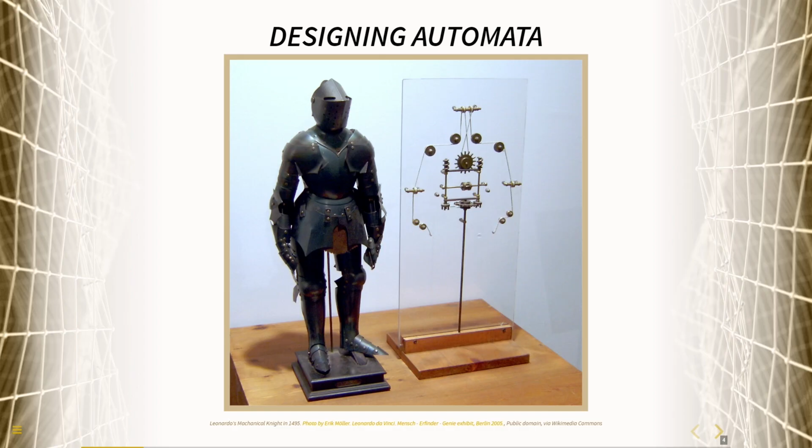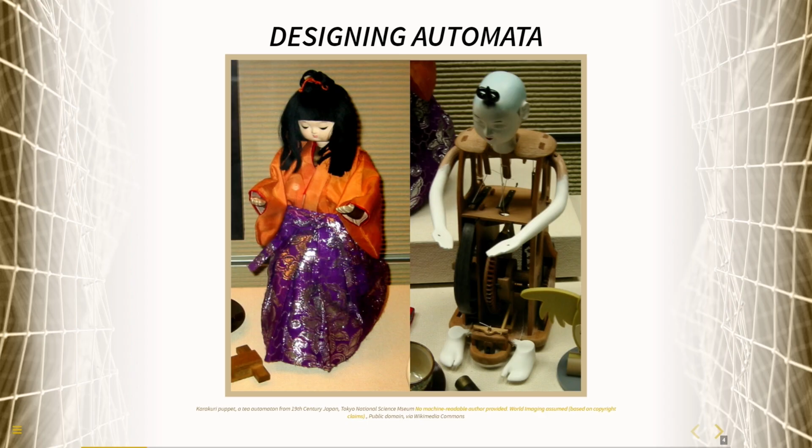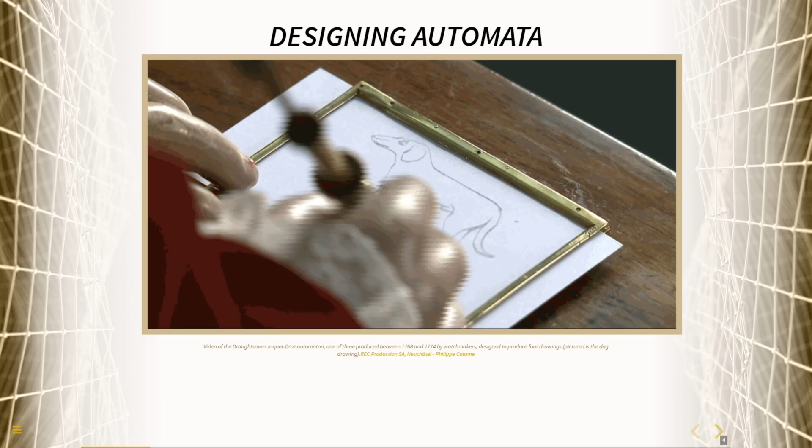As we began to build more and more kinds of automata, the level of sophistication started to increase. Thinking back to the technological changes happening during this time, so many different ingredients were being introduced, whether different kinds of materials or different kinds of understanding, that allowed things to become more and more sophisticated.

So much so that sometimes we would even build things like this. This is the Mechanical Turk in 1770, a chess-playing pseudo-automaton. For the longest time, people thought we had actually developed a chess-playing automaton. People would come and play chess with it and be foiled by this machine. But the reality was, under the hood was a guy just sitting there playing chess back. It was still an ingenious device, still filled with intricate mechanisms, but it was mostly trickery.

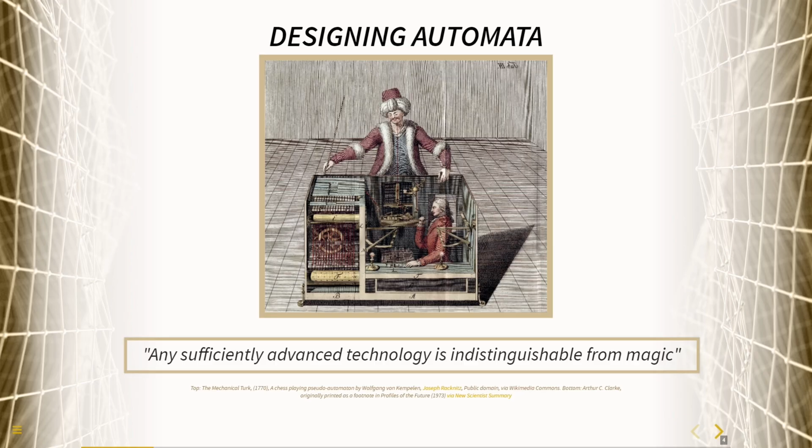Which is an interesting juxtaposition with this Arthur C. Clarke quote about technology: any sufficiently advanced technology is indistinguishable from magic. Often when we look at different kinds of tools, especially modern day AI tools, they sometimes feel magical. But I want you to remember that under the hood is human effort, and under the hood are different kinds of constructs that we have actually put together.

In 1948, Norbert Wiener introduced the concept of cybernetics. He wrote this incredible book called Cybernetics, or Control and Communication in the Animal and Machine. He was a polymath, so this spanned many different concepts and disciplines. At its core, you can define cybernetics as the study of controlling the flow of information in systems with feedback loops. He had many applications outside of computing, but I'll focus on the applications within computing for our conversation today.

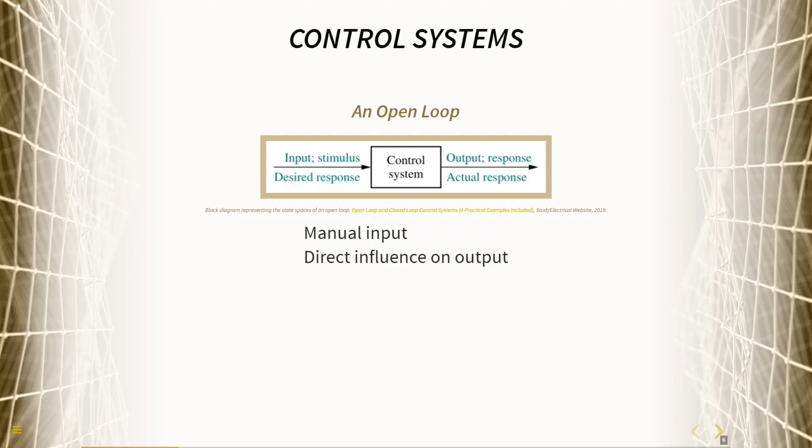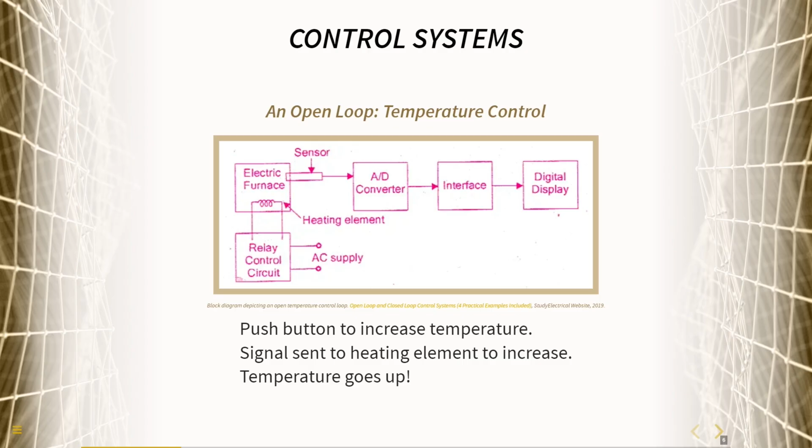You can think of this in terms of there being a manual input, a direct influence, and an output. This is also known as an open loop. For example, a temperature control system using an open loop would simply have a push button to increase the temperature, a signal would be sent to the heating element, and the temperature goes up. Easy peasy. But what if you want things to adjust? What if you want the world to adapt to your needs?

Wiener introduced the concept of feedback in control systems, and this was revolutionary at the time. It meant you could take the output of that second state and use it to influence the entire action all over again. You could close the loop, so to speak.

A closed loop system has a reference signal, an input that you start with. There's an error detector that compares the feedback against that reference signal, and then it moves through the system to give you a particular output. If there's a difference between what you want and where you started, the desired output is updated—an adjustment is made.

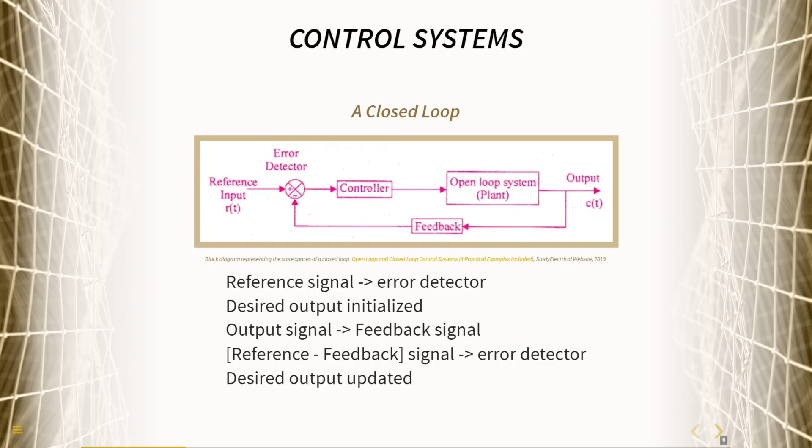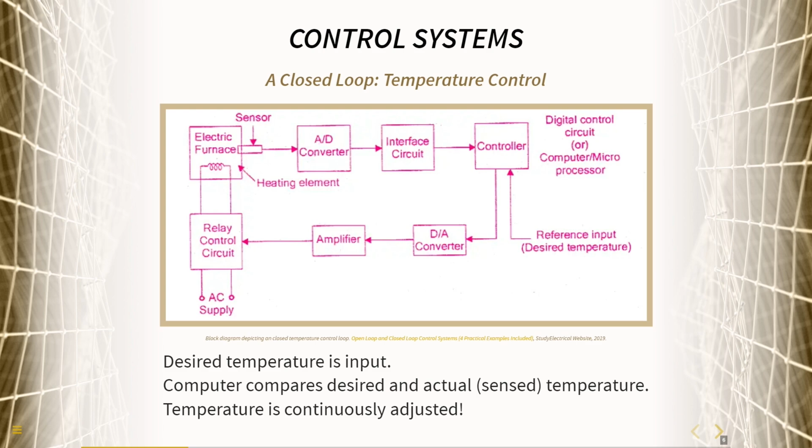The temperature is then continuously adjusted. This is how modern thermostats work. This idea of feedback is incredibly powerful, because you can now close that loop and make continuous adjustments, monitor, and make changes in the system as you're working it.

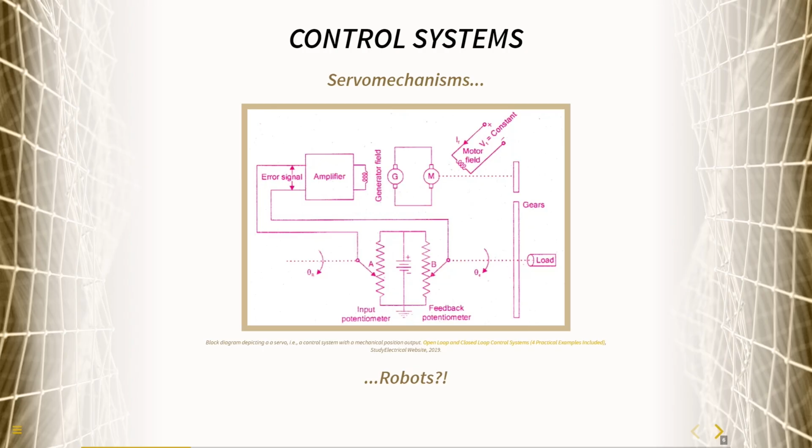This laid the foundations for the concept of servos—control systems with a mechanical position output. It meant your input could say, okay robot, move there. There's a lot more in between servo mechanisms and robots, but this really laid the foundation for how we think about and build robots even today.

So let's spend some time conceptualizing automation. Automation can be defined as the use of technology to perform tasks with reduced, sometimes no, human assistance. But that isn't just a binary thing—it's not yes or no. There are different levels of automation we can go through.

Basic automation involves simply automating a simple repetitive task—think of a forklift that just picks a box, puts a box, picks a box, puts a box. From there, we can bump up a level to process automation, where we automate a complex set of workflows across systems. Modern software engineering involves a lot of process automation, where I make a change in the code here, and when I deploy that code to a server, the entire chain of actions should happen.

You probably use a lot of different kinds of automated processes in your own work, whether it's something like setting up a calendar reminder, or saying the moment I invite so-and-so to a meeting, send them a Zoom invite. These are basic process automation examples. Our goal is to get to the idea of intelligent automation: automated responses that improve through learning from priors and context. It's that feedback concept again. At the core of a lot of what we talk about is feedback and contextual awareness. Let's look at the different genres of AI that take these ideas into account.

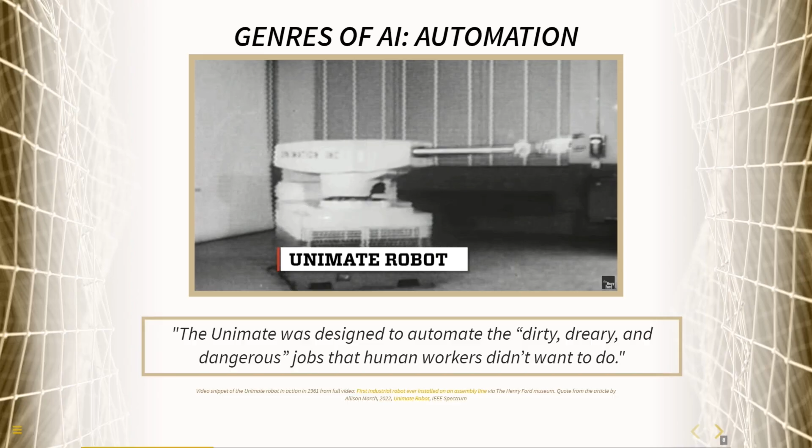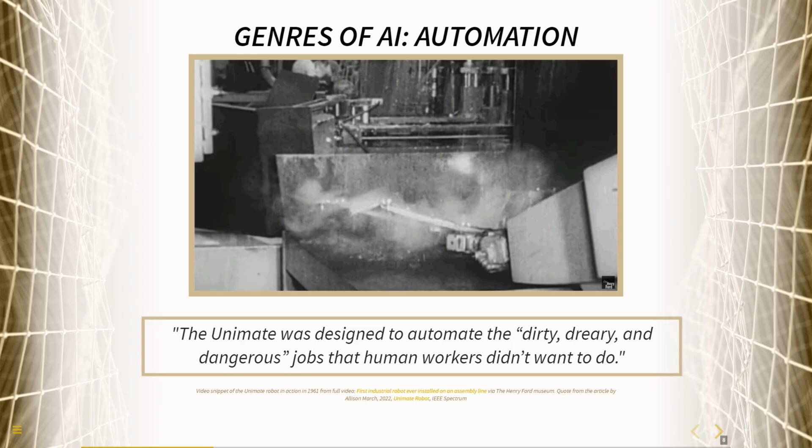First, let's think about automation. The first industrial robot was the Unimate, designed to automate the dirty, dreary, and dangerous jobs that human workers didn't want to do. Remember, someone had to define what those jobs were. I chuckled when I saw a marketing image of the same robot serving drinks at a bar, because apparently that was also an example of a dreary job somebody didn't want to do.

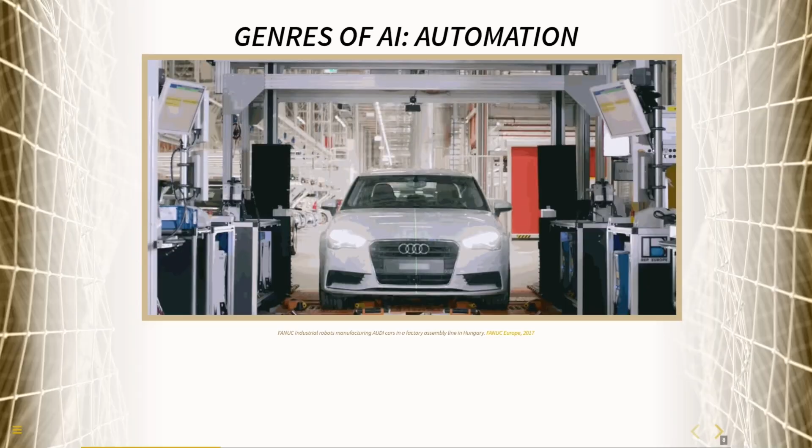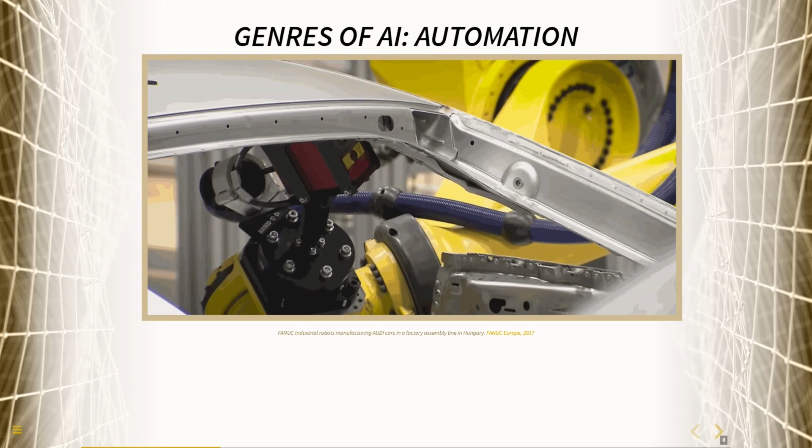There are industrial robots manufacturing entire cars in factories. This particular example is the Audi factory assembly line in Hungary. You can see from start to finish the many different kinds of automation, coordination, and synchrony that has to happen in order to go from metal parts to a moving car.

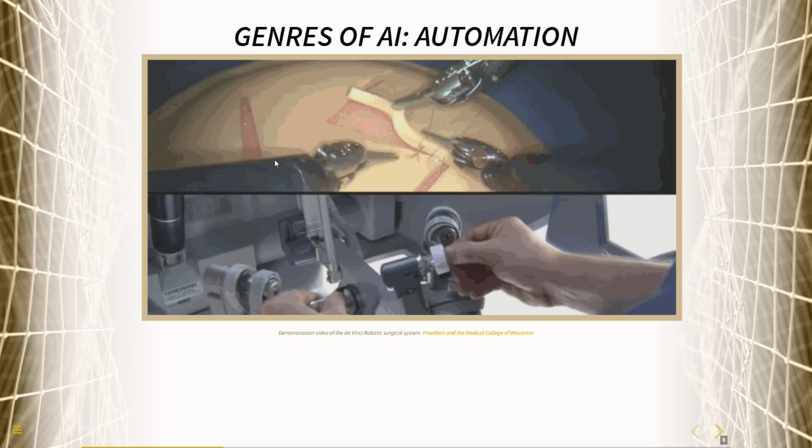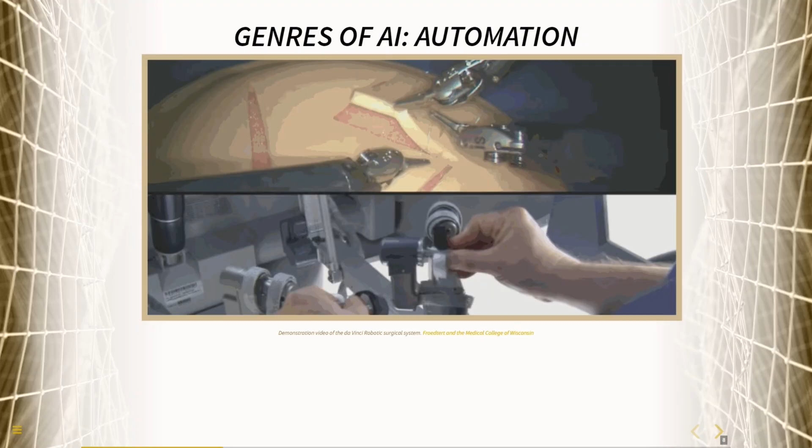A lot of these industrial robots, I think it's important to remember, are actually fairly specialized. In this case, we're looking at the Da Vinci surgery robot, designed for very specific types of human-robot interaction. Here, it aids a surgeon in performing specific minimally invasive surgery tasks.

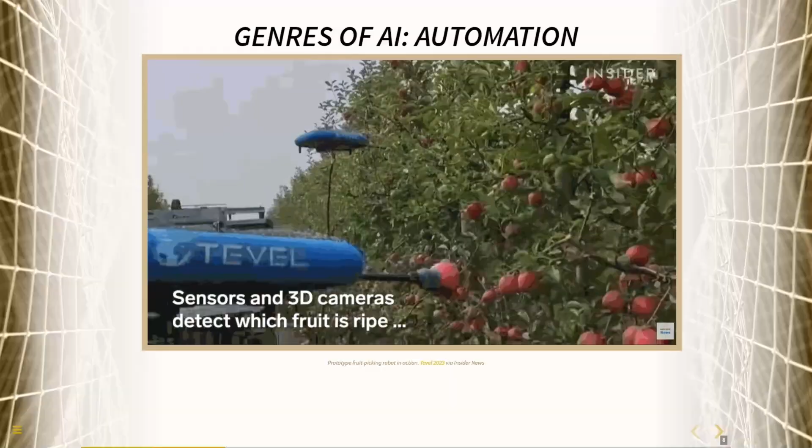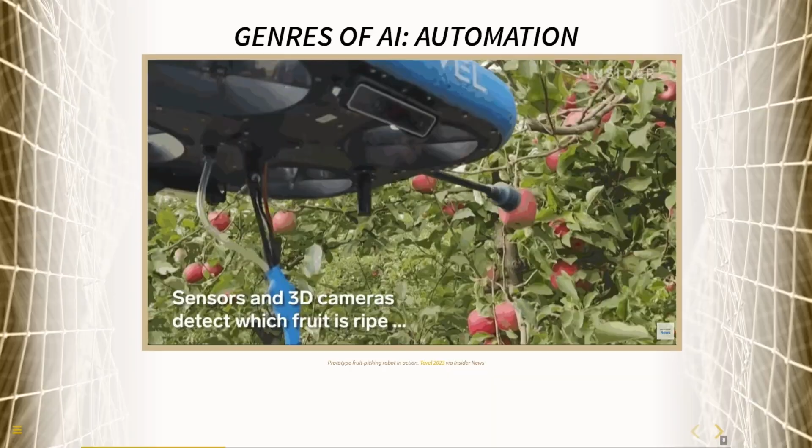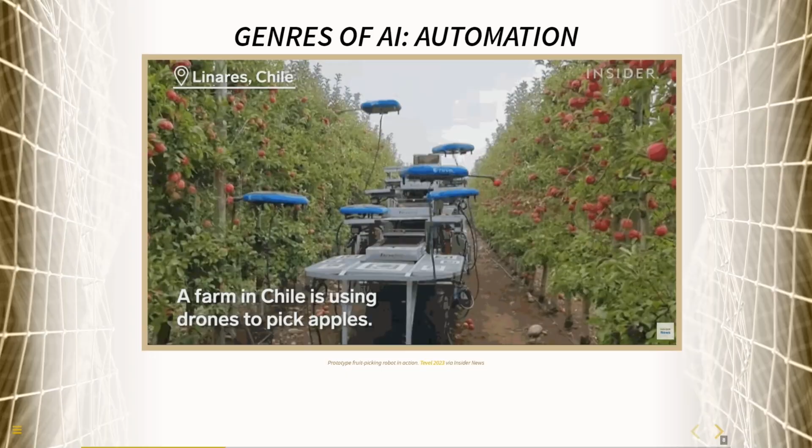In that sense, industrial automation is always a specialized task, as we map workflows to determine optimal modes of production in very specific contexts. Each of these examples required someone with specific understanding of how humans performed these tasks, in order to determine what to automate. What constitutes a tedious, dirty job worth automating? Later on we'll talk about the impacts of automation on labor and society, but I want you to keep in mind this idea of task mapping as critical to producing specialized technologies like industrial robots.

We're not quite at the point where we're having robots making robots, but you can see that this is the general trajectory things are moving in, for better or worse. We'll dig into this a bit more another time.

Next, let's look at robotics. Robots, as a general class of AI, are for the most part general purpose technologies—we're clearly still experimenting with form and function. But at its core is that same robotic architecture: a sense, a decide, and an act. In this case, we're looking at a slightly more rudimentary sense-decide-act architecture, where sensor input data is fed into a decision tree that determines actuator function.

If we introduce the concept of feedback, we again have this reactive sense, decide, act architecture, but now we're introducing reasoning, monitoring, and adaptation as part of the decision-making process. Feedback instantiates as reasoning about the behavior of objects, planning to change the world, monitoring changes, avoiding objects—doing something different. One of the biggest things we had to start doing was think in modules. As robotic systems got more complex, it wasn't just a single arm grabbing a drink; we needed to integrate modularity as an architectural pattern in the construction of robots, meaning each component might become different subcomponents.

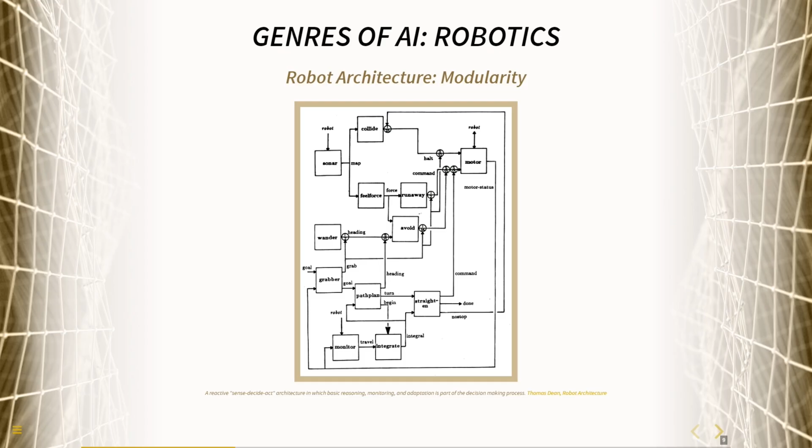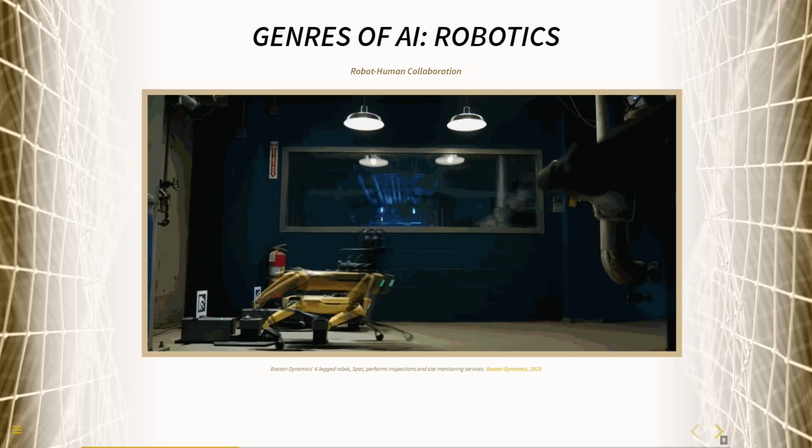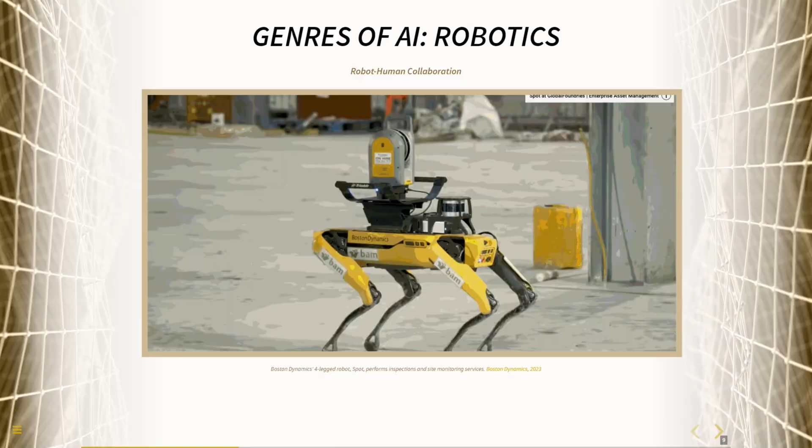But if we look at that same form factor, Boston Dynamics has gone in a completely different direction with the four-legged robot. Here we're looking at Spot as it performs inspections and site monitoring using a suite of complex sensors for spatial mapping, allowing it to detect issues or determine what comes next.

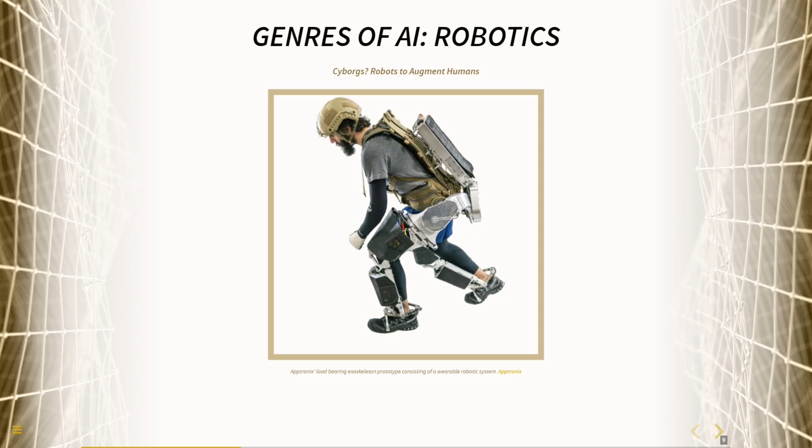I think it's a little bit amusing because in some ways we're already starting to touch on this concept of cyborgs, where robots are really there to augment humans.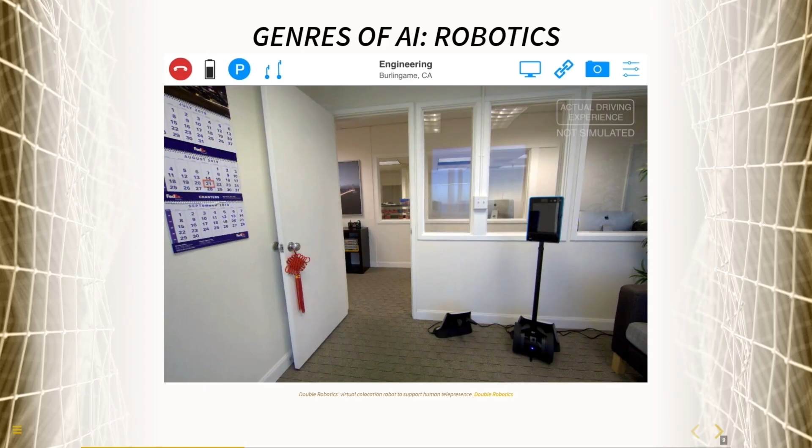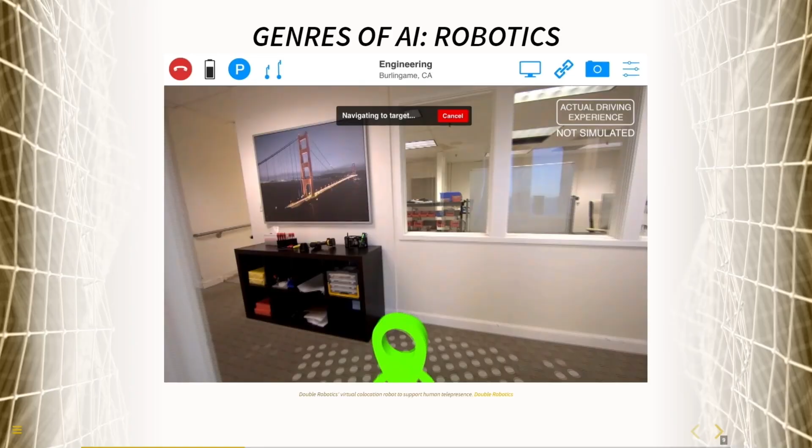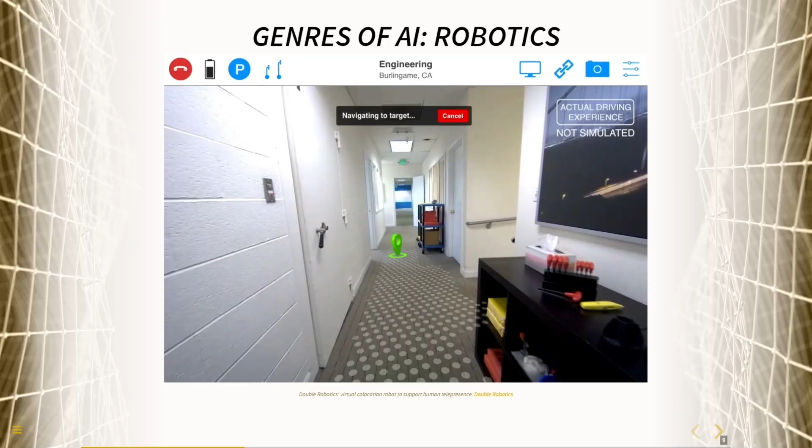A different form of augmentation, which is equally interesting, is Double Robotics' virtual co-location robot, designed to support human telepresence. In this era of remote and hybrid work, you should theoretically be able to log into this platform and drive yourself around as you interact with coworkers and go about a normal workday. So here we can see this idea of using robotics to collaborate with each other and augment our own experiences in the real world.

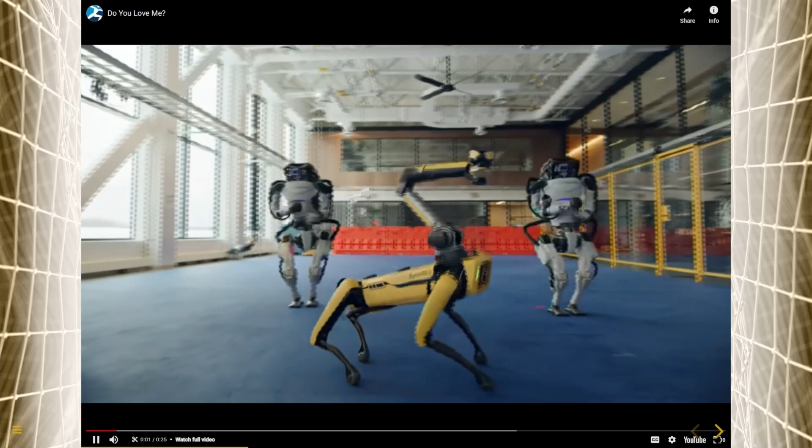So we've built a whole bunch of different kinds of robots. A lot of them are fun, a lot are interesting, and a lot are still conceptual, but we're beginning to see the different ways in which robots can actually start to integrate into our daily life.

One of the clearest examples of this is in the subdiscipline of autonomous vehicles. Going back to this idea of sense, decide, and act, an autonomous vehicle would theoretically be able to go straight, and the moment it sees an issue, it should be able to steer right or left, adjusting its movement as it goes down a path.

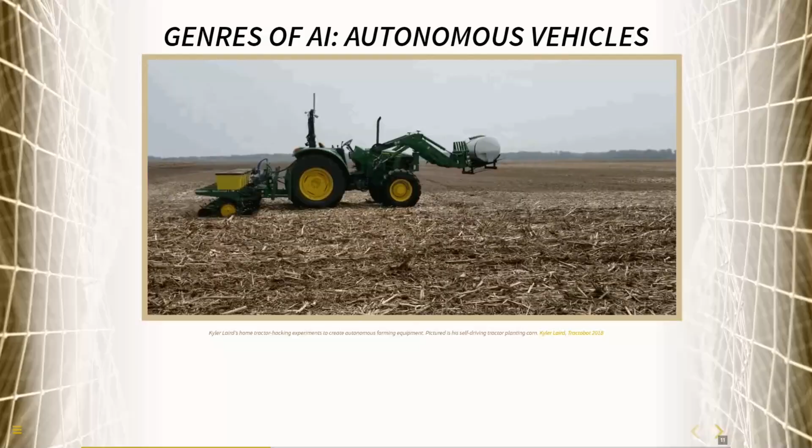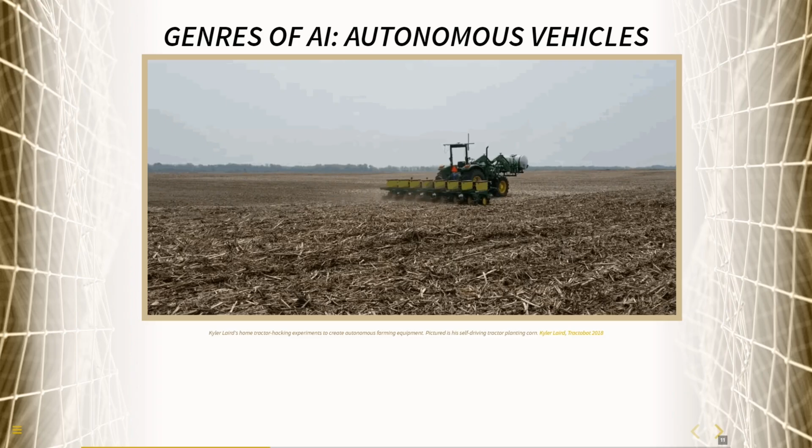We've done this in many different contexts. One of my favorite examples is Kyler Laird's home tractor hacking experiments, where he sticks together a bunch of microcomputers to build himself a self-driving tractor that plants corn.

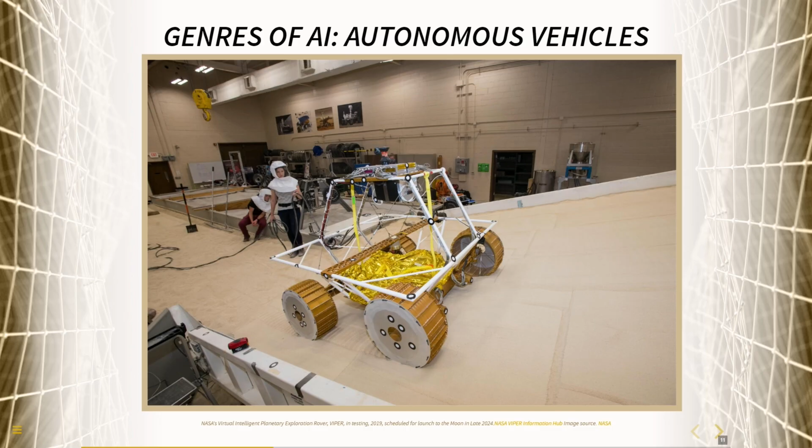So there are analogs for this in non-vehicular examples as well. They're just not standards yet.

So the core concept underneath an autonomous vehicle is this idea of the operational design domain. If I have a vehicle, can I detect the environment, geography, time of day, traffic, objects, even people, to say, okay, here's where I'm working within? And that is really what is used to drive decision-making in the vehicle itself. Ideally, we'd use vehicle data itself to map that ODD, using sensors to say here's the region of interest I'm in, and map some initial boundaries. I'd use data and scenarios previously codified, and run tests or simulations in a closed course before deploying it to the field.

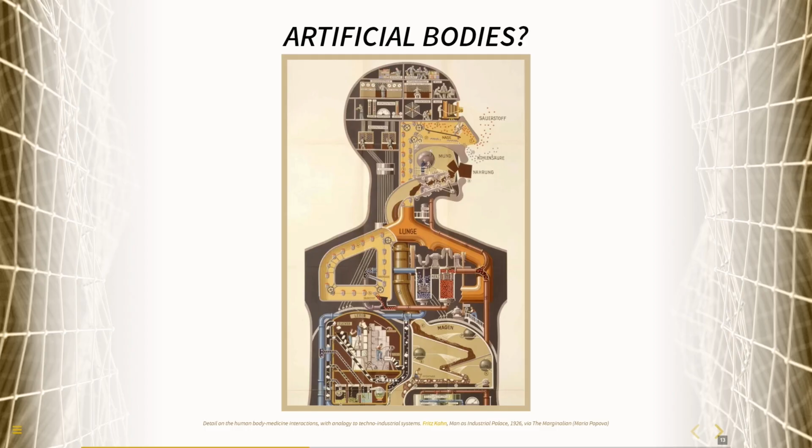In a lot of ways, some of our biomimicry has been doing a bit of this. We've been taking this very squishy concept that is the human, or even the mind, and trying to reduce or abstract it into these very basic components that we can then codify as modules in a system. This is really hard, and it's also not clear whether this is actually what we want to create. Are these the cyborgs we're intending to create, or are we inadvertently mimicking parts of ourselves that we either just understand enough to write code about, or sometimes don't understand the full implications of?

At the same time, there are a lot of really inspirational examples, including from the biomechatronics world, where people look at how to create human-centered prosthetics that represent and reflect what people want from their bodily augmentations. In so many ways, we are trying to think about what it means to not just create artificial intelligence, but also these artificial bodies.